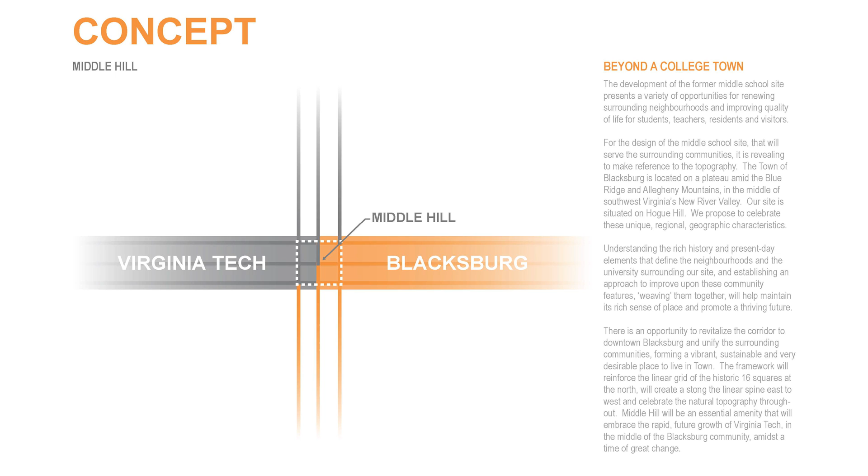We see this concept as a gradient, a meshing and weaving of the community of Virginia Tech and Blacksburg, which right now operates as very much two things—but really finding out what that actually means. So the proposal is the hinge between those two communities that are really one. The question we have for you is: what kind of place do you want Blacksburg to be? I think that's critical in thinking through the vision and setting up a new model for how development works, how public space works, how people interact.

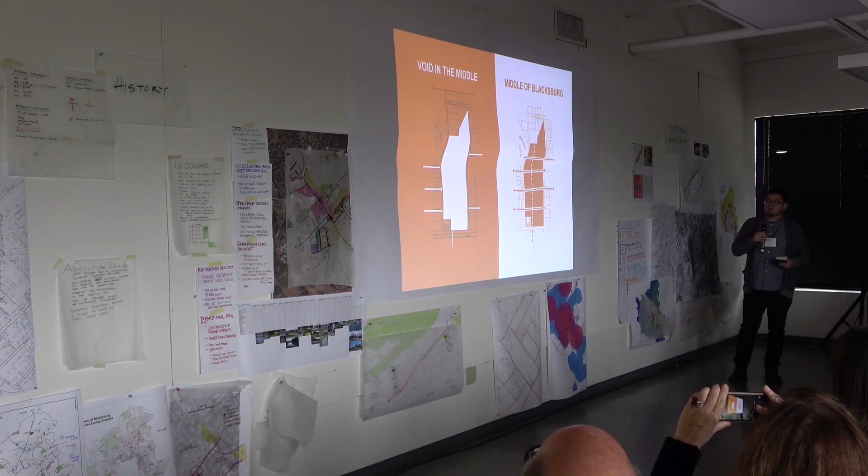The site as it operates right now is really a void in the middle. With these neighborhoods around it, it's fenced, not used, and the streets just dead-end into it. It has great opportunity to be activated, to actually become the middle of Blacksburg—a center where you cut across, move through the middle, engage what's happening, and create this engagement of the urban fabric.

So how do we do this? We have three large ambitions, three ideas to think about. One is creating diversity in demographics but also in generations—how do we get people of different ages to interact and see what the other is doing? That's one of the benefits of community: having people who are excited to be here.

And of course, providing meaningful open spaces. Just having open space or green space isn't good enough—we need usable and meaningful public space where people can engage with their natural environment through the seasons and see what the community is up to.

And lastly, really exciting Blacksburg with a slice of an urban experience. I think the bones are there, and the excitement is there where people want to be out, they want to be biking, they want to have a beer, and really finding these opportunities to make it a really exciting place.

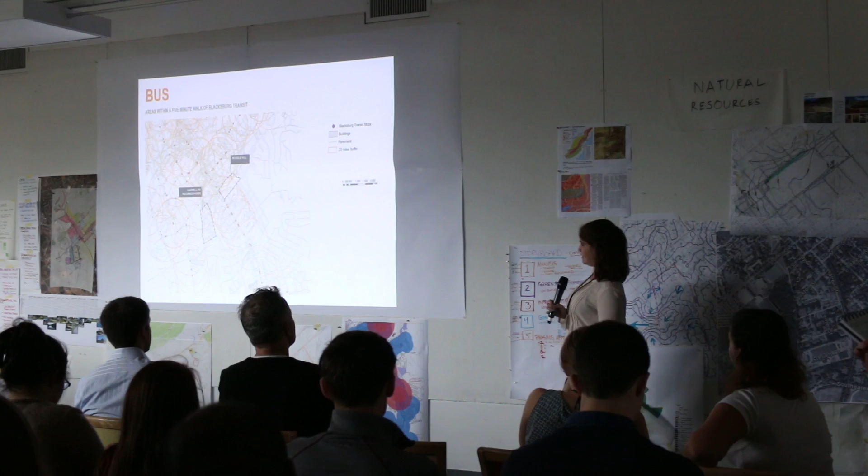Okay, I'm going to go over some of the analysis for both groups. We kind of jointly did it together. So a really important element in Blacksburg is the buses, the communication between Virginia Tech and the town of Blacksburg, especially as a student, since there's not a lot of parking on campus. So we mapped the bus stops to make sure these sites have a connection within the town of Blacksburg. The circles represent a quarter-mile radius, which is about a 5-minute walk, a comfortable walking distance.

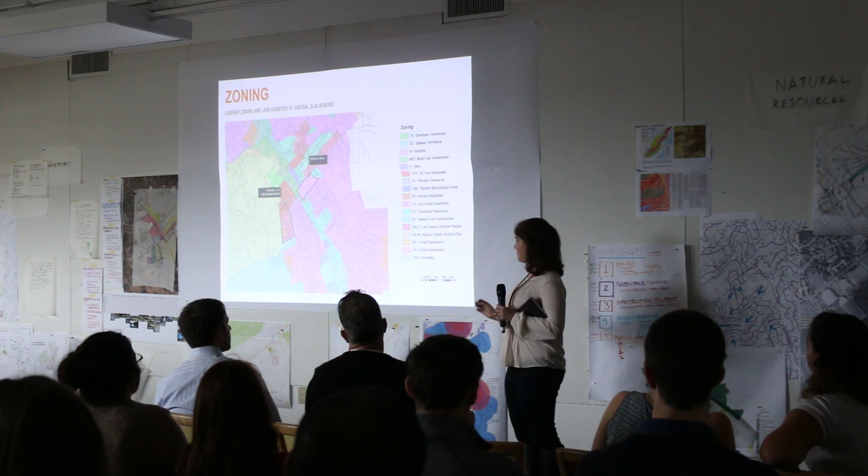So zoning within the area: the green to the left of our site is the commercial downtown, your mixed-use shops, restaurants, and small shops, with the top being apartments. Next to that is the campus. Then to the right, that's kind of our site, the Middle Hill, which is really the gap between the downtown commercial and the rest of the commercial area strip. The Harrell Street neighborhood is mainly residential, more historic residential, with some lower density residential use.

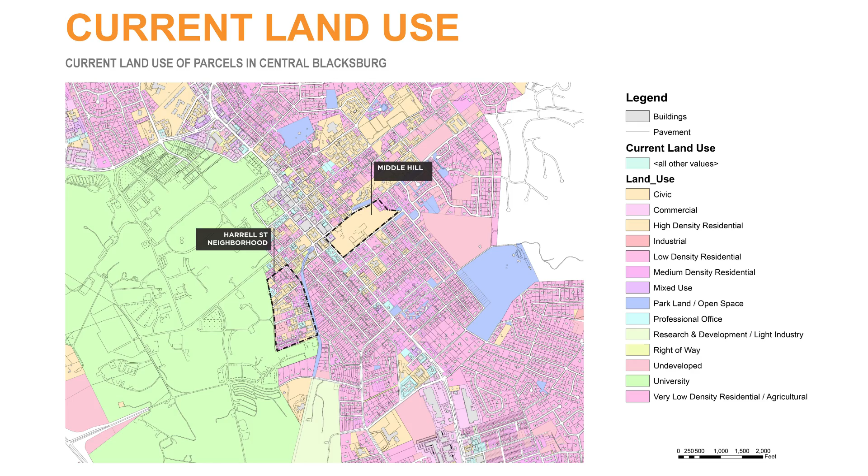So we looked at the current land use for the town, and Middle Hill was actually still zoned as civic, even though it said it was going to turn into low density. And Harrell Street is very much medium density residential, which is picking up its current population and density.

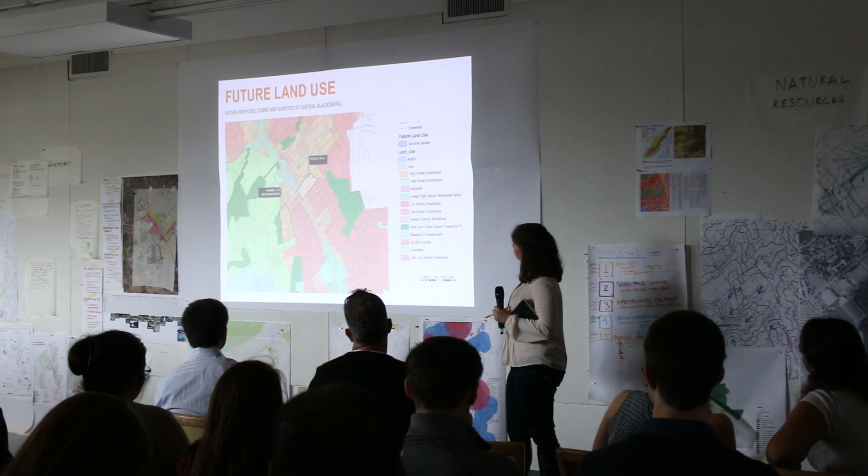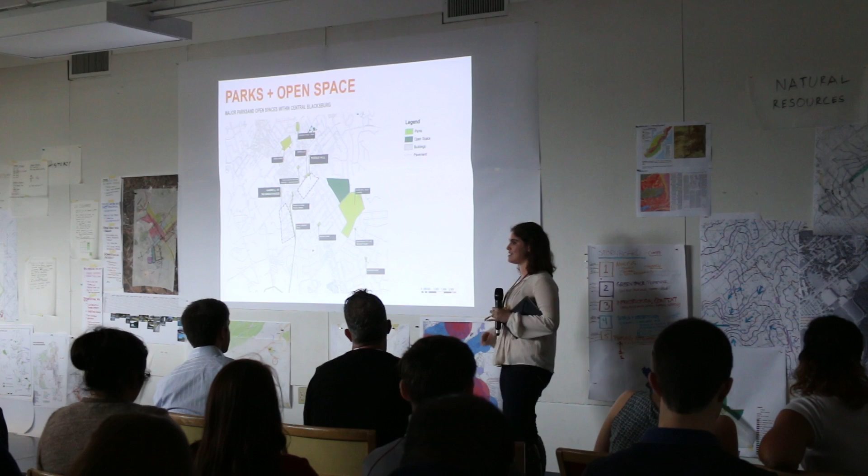Another thing to note is that right next to Harrell Street is the Huckleberry Trail, a rail-to-trail program for bikers and pedestrians that connects us with Christiansburg and to the Jefferson National Forest, which is very popular for students and for the residents of Blacksburg.

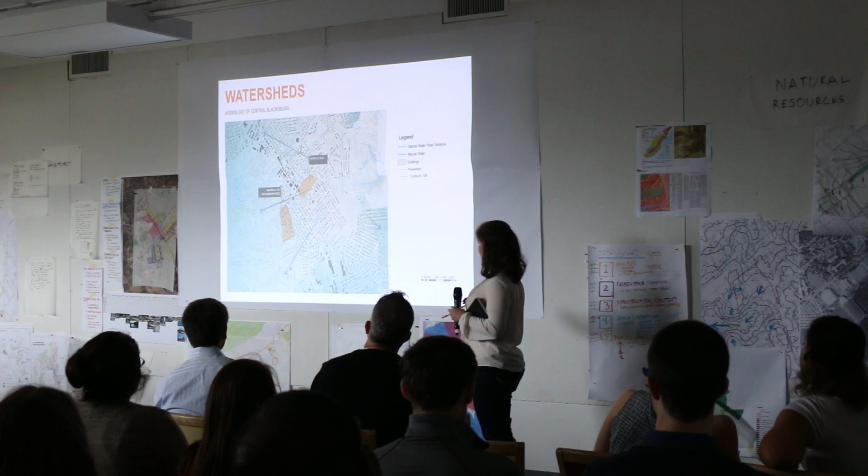So, our watersheds in this area: Stroubles Creek runs right underneath Drillfield and Virginia Tech, with some other minor watersheds, and all of it flows away. Where the golf course is, up there, that is the high point, and from that point you can see all of Blacksburg if you ever want a good view. All the water flows away from that point, so we are at kind of a higher point where our two sites are.

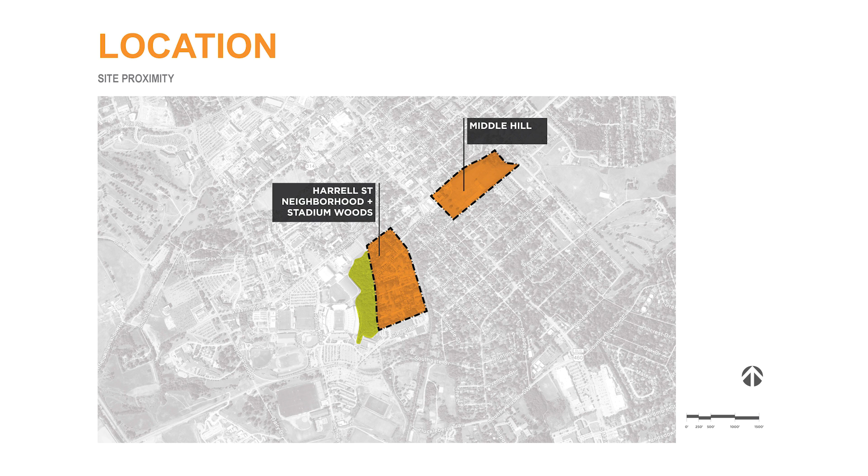So these are the two locations of our site: Middle Hill, which is really the middle between the downtown and the commercial area as I said earlier, and the Harrell Street neighborhood, which is next to Stadium Woods, the only remaining old growth forest in this area. It's also next to Virginia Tech and Lane Stadium, so it has become an important part of the Virginia Tech culture for tailgating and other areas, and a lot of students like to live there because it's so close to classes and campus.

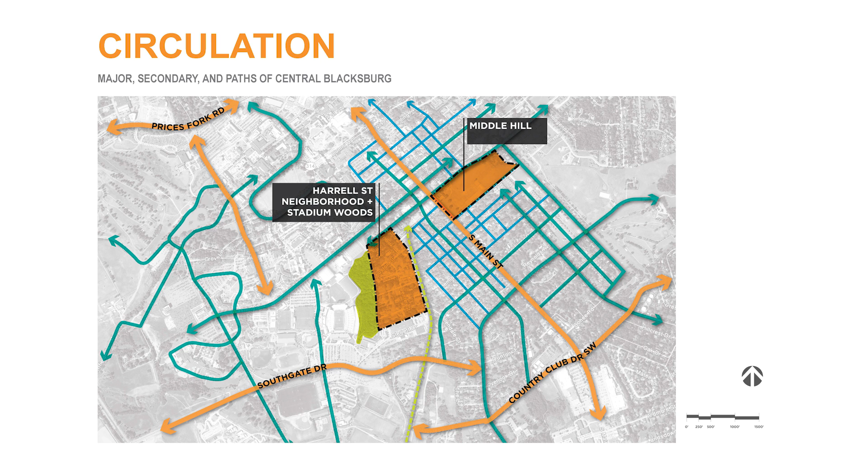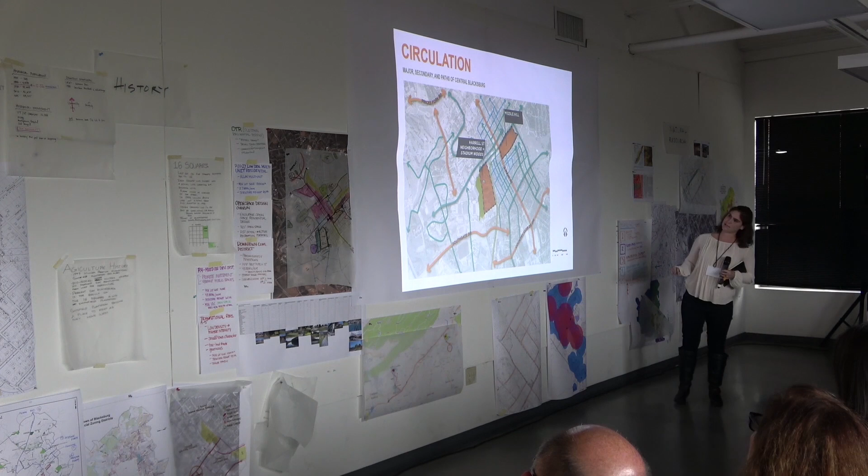So some major circulation is Main Street, where all our shops are, and some minor streets off of Main Street are important as students and residents try to skip Main Street. Other important things, as I mentioned earlier, include the Huckleberry Trail, the main pedestrian and bike path in Blacksburg, and some minor streets that help fill the void of getting around Blacksburg. There's the Country Club off to the right, and College Avenue, which goes straight from Virginia Tech to Main Street.

So some basic history of Blacksburg: it was first settled by Native Americans. When the Europeans first came here, there was a lot of conflict between the Europeans and the Native Americans. Then the Black family settled in Blacksburg and laid out the original 16 square grid, which I will get to next. As it developed, Virginia Tech was founded in 1872, and that promoted Blacksburg's growth.

However, Blacksburg did not really grow until post-World War II. With the GI Bill, a lot of World War II soldiers came back and went to Virginia Tech, and that's when our need for housing came through. Also, when the university transitioned from a military school to a full public, civilian co-ed school,

it saw a big population boost, and then we also created a big population within the town of Blacksburg to support the school. The 16 squares was the original grid laid out by the Black family, and they divided each square into four lots. This is really important because it's right next to the middle school site, and this fabric is still here today. So one of our goals was to try to weave the existing infrastructure with what is already there.

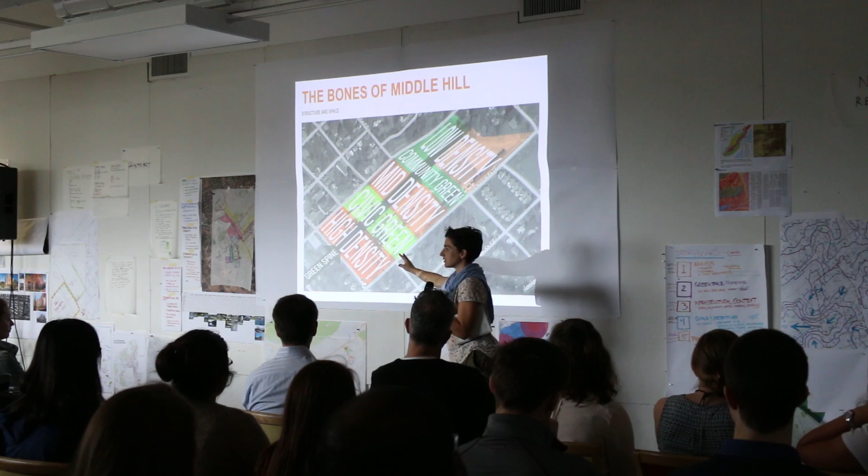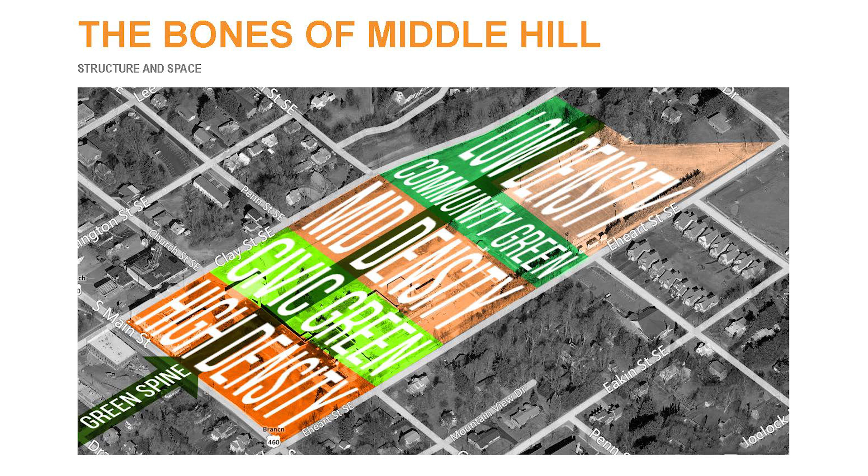As was mentioned, our idea was to incorporate the former middle school site into the urban fabric of Blacksburg. Our overall concept was to start with the highest density along Main Street, where there's already more high density development, and to let that ease back with middle density and then low density development as we get closer to the single family residential areas, breaking that up with green space.

We had two types of green space we wanted to include. One was the civic green, which feels more like part of the urban area, like a city park for everyone to enjoy. And then a community green that speaks more to the neighborhood that's there.

Looking at how that schematic could work onto the site, we began with that 16 square grid and decided to use the circulation as a structuring force for the rest of the design. You can see here how we've brought some of these streets all the way through the site, and some of them just come to serve residential areas on the end.

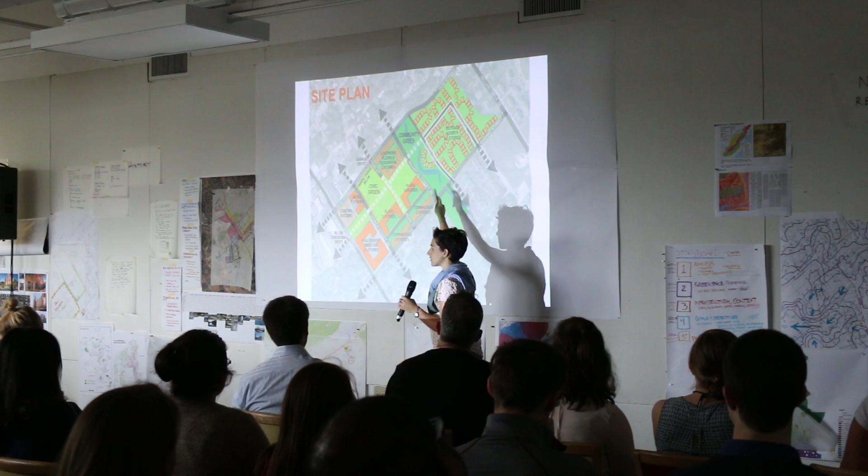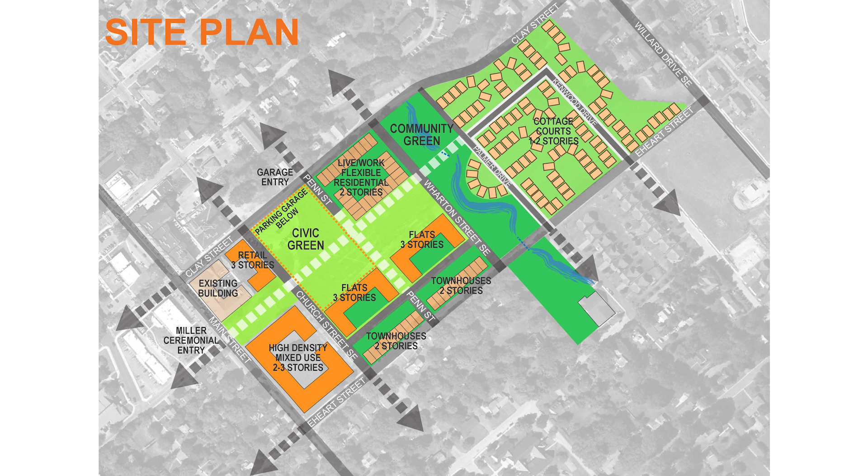More specifically, how that's built out is taking that pedestrian line and making a green spine that runs through the site, so that from this point on Main Street, you're drawn into the site. Right along the edge, we have some high density mixed use development. We're kind of open to what that could end up being, and it could be transitional over time.

Moving back onto the civic green, we blended the high density and mid density so that the civic green really had an urban presence with some higher story residential facing the park. Then along Eheart and Clay Street, having more two-story residential townhouses on this side to relate to the more neighborhood community, and more potential for live, work, or flexible housing space on Clay Street to continue to speak to the urban fabric on the other side.

And then this community green that's going through the site here relates to the church and school that exists up Palmer Drive, taking advantage of the topography of the area, with a pathway up in that top corner.

There's a kind of outflow of a lot of the water from this neighboring area, so we decided to emphasize that in creating a community green that is speaking to the stormwater that exists on site, and kind of creating a more ecologically based and more flexible community green space where families could have their children come play.

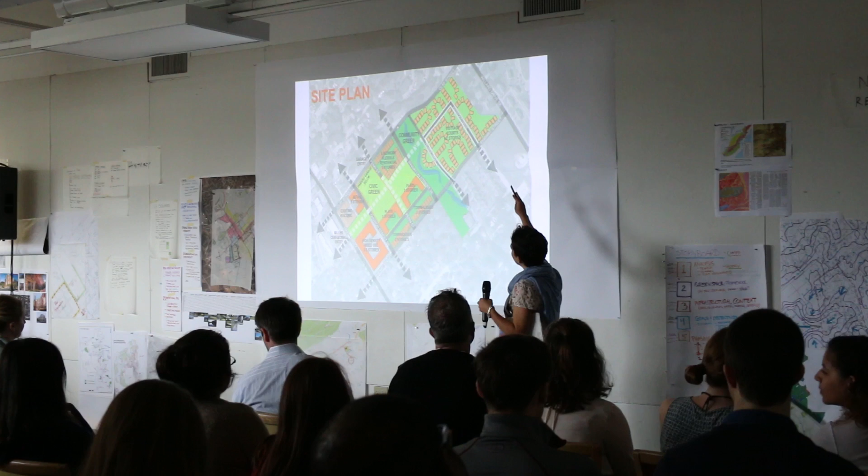And then the low density development beyond, we were looking at more of a cottage court style where the houses are facing more private greens, but it's still a community feeling. So as opposed to getting as low density as the areas around it, keeping it at slightly higher density, more affordable housing in that area.

So this gives you some cross sections. This is the Middle Hill Promenade, that's Main Street there, and then going back to the smaller scale residential so that you can get a feeling of how those different typologies would read in relationship to each other. And then this would be a section along Main Street looking into the site here.

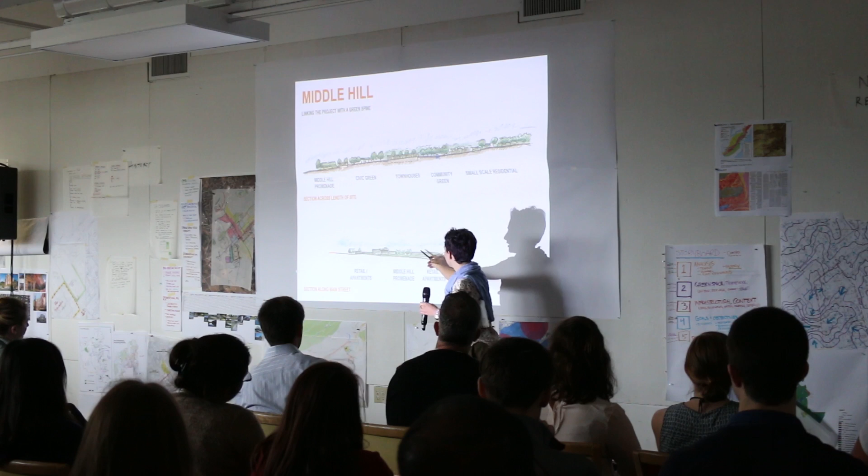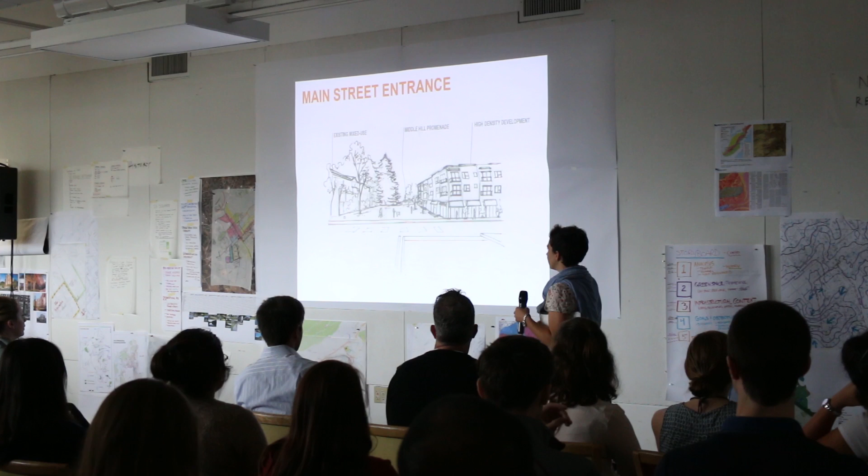So we've got the existing retail and apartments, and then the promenade that pulls you into the rest of the neighborhood, and more retail and apartments anchoring this other end. And so this is a view of what that might feel like, really allowing the space between the buildings to be like a community space and a green space.

And so this is looking at just what these masses might feel like if you're coming from Miller Street. We thought the connection to the library down Miller Street was really important, what it felt like for you to come down that street.

Maybe you've just rented a book and you want to go read it in the park. What it would feel like heading down there. You've got this strong urban feeling of the buildings next to you, but you're going out into a more open space.

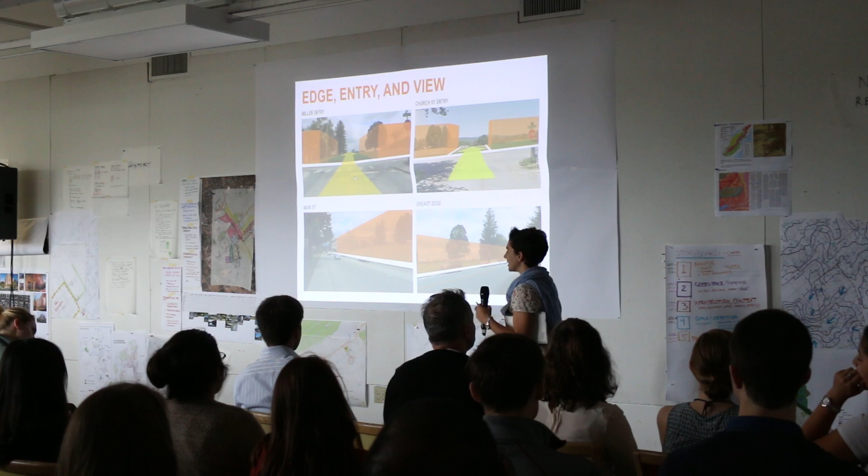So I'll continue to talk about the massing study. And what the model is trying to convey is just in block form what might be the spatial differences along the whole entire site. So what's omitted from here is architectural differences or softscapes or hardscapes, but really just looking at the spaces.

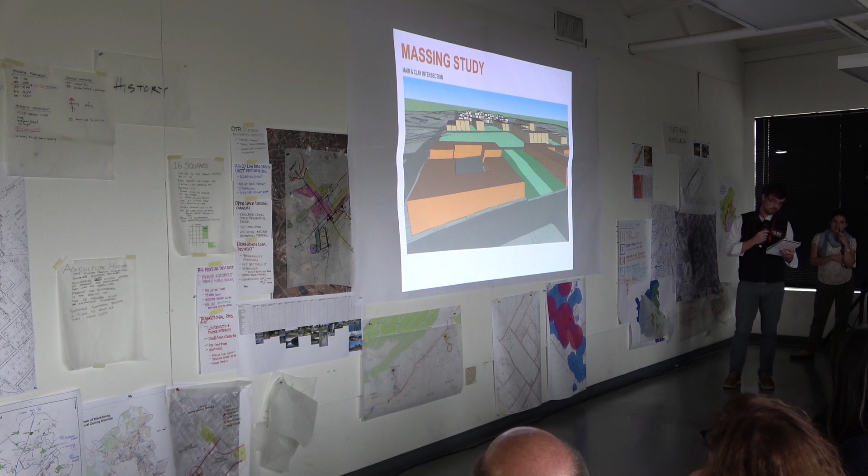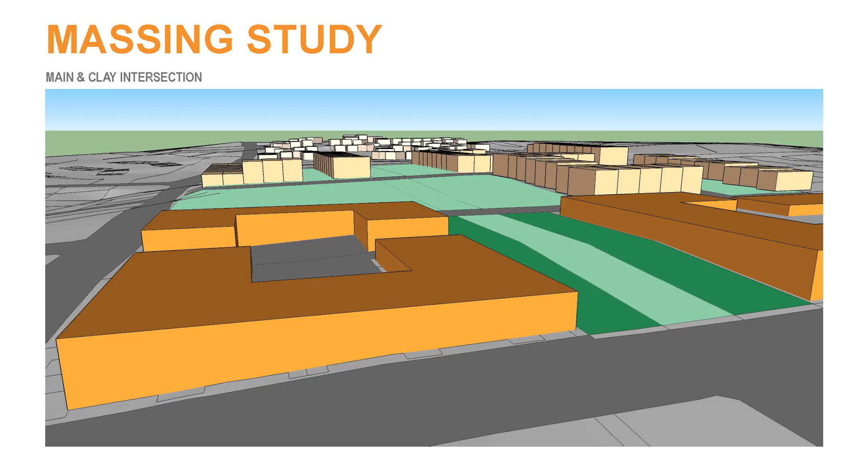So here you can see the strong spine that goes through the middle, as well as how the topography relates, in that you have an existing building on the corner. Again, the spine, you can see how we phase it, and that the site is fairly structured on the Main Street side and then loosens up as you go through the civic space and then on through the mid-density and then to the lowest density in the back.

You can find opportunities to hide utilities or service sides of the retail or shops on the inner side. Maybe that's parking as you go through the site.

Here's Main Street and Eheart, and with the topography, if you have a 3-story building that exists, you have more of a residential feel on this side as you're approaching downtown. Right now it's a very stark contrast, and that might be stark just because you don't have a feathering effect.

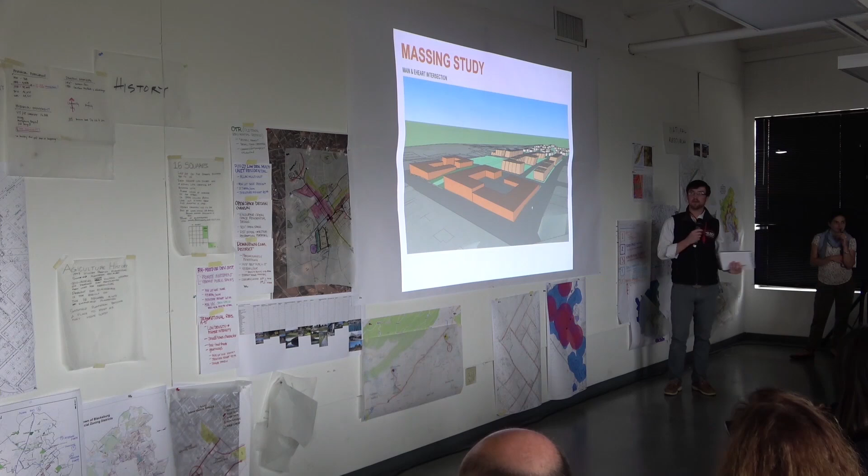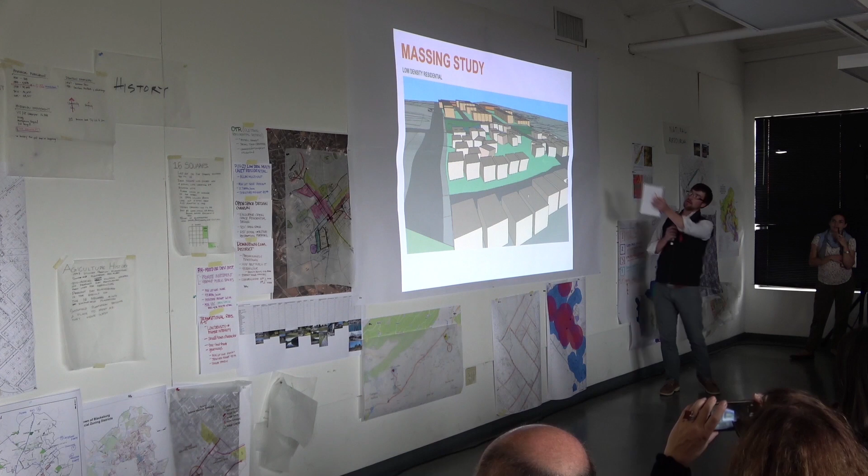And so we're stepping down the buildings from 3 to possibly a 2, but trying to find some opportunities for diversity through there. This is looking from the back of the site where the low density housing is to the front of the site.

So myself and my colleague Lauren are going to be talking briefly about the housing typology, or in other words, what those building masses can begin to look like and function as places for people to live.

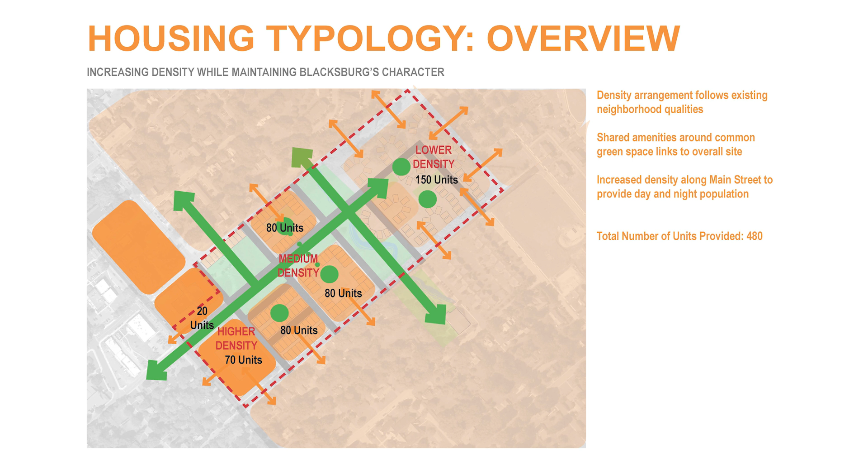So as we mentioned before, the general concept is to go from higher density to lower density, taking what's already existing in the surrounding neighborhoods and bringing that density, that typology, that character into the site. So in the end you have that retail strength on Main Street, and then going back to more of the cottage home experience in the back end, all working off that central spine.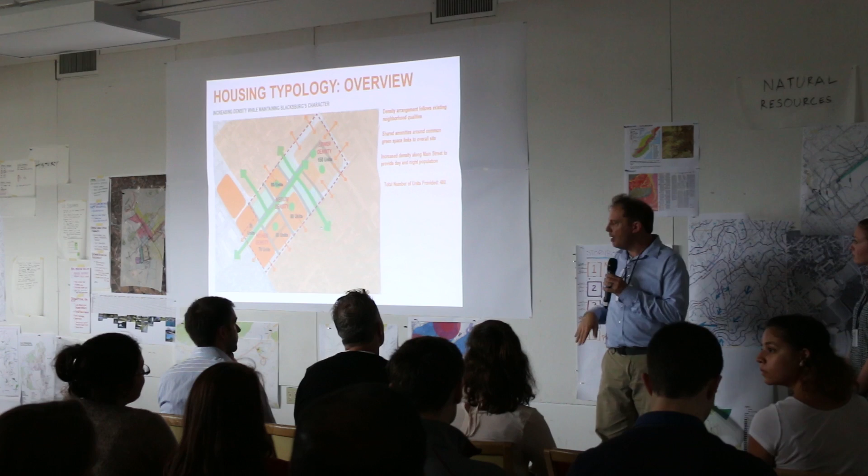Perhaps in each of those typologies it might be a simple common space. On the downtown density side, we're looking at roughly 35 units per acre, kind of what's already on the northwest corner, where you'd have retail on the ground level with apartments above. What we're thinking for the overall site is to have a mix of occupants, predominantly maybe students, people looking for affordable housing, young urban professionals, and also senior citizens.

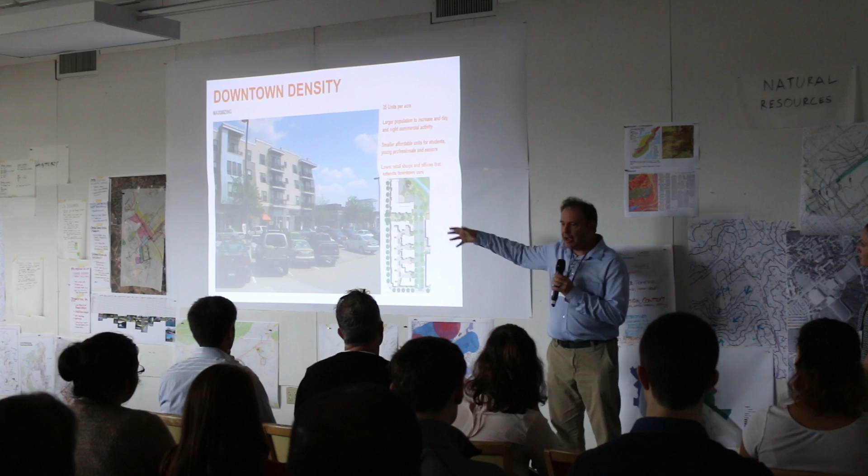Otherwise, having that strong presence, creating that facade, and maybe in the back having tuck-under parking and other public amenities, open spaces. In terms of activating the streets, having retail on the ground level like you already have in downtown Blacksburg, but perhaps also introducing live-work opportunities. So along some side streets, if offices come in, great, they can set up shop, or if that need isn't there immediately, it can become basically a living unit. So there's some flexibility over time.

And then as we start getting to the medium density, this might be another typology of student housing, where you have again a parking lot that interfaces with common amenities, backyards, barbecues, and so forth.

So we're really starting to look at making these streets for people, and this is an example of a street that is shared by people and cars. So being able to create those spaces, kind of like College Avenue here, within the site that aren't strictly specific to vehicles and can be transitional between the car and the person.

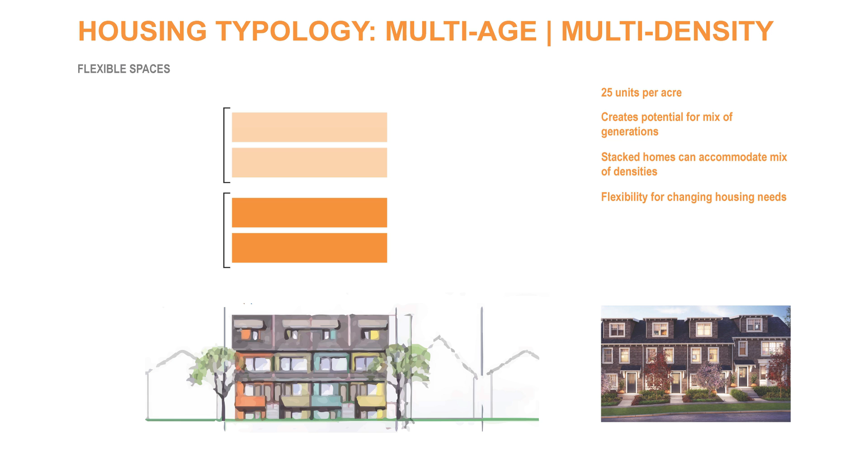This was looking at medium density housing, and flexible spaces in some of these structures that could be multi-age and multi-density. This is basically a stacked townhome design, but looking at how we could alter the standard of who's living in the housing. So how can you put old people with young people, or families with single people, living in the same building and having that mix of generations and densities.

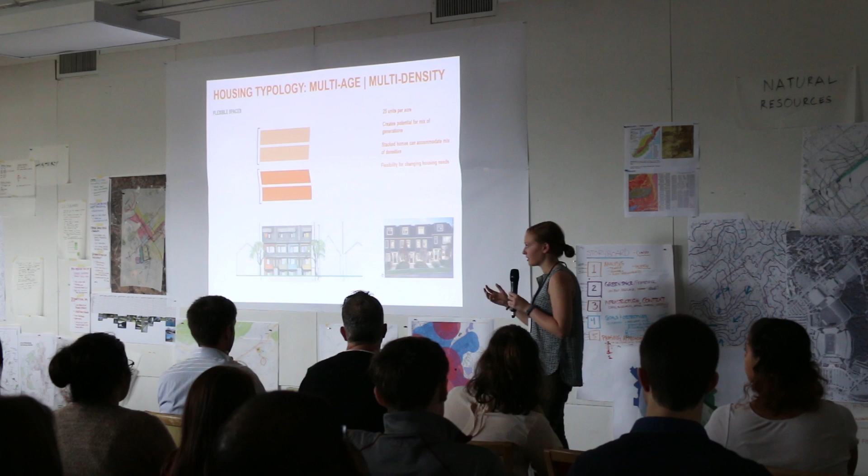This was also in the medium density area, so both of these were roughly 25 units per acre. This was really looking at communal spaces and private nodes, creating these spaces and this network of spaces and how they relate to the building. So we were looking at a few diagrams pointing out some of these public spaces and how they can be tied together, and then how some spaces can be shared, and where the private parts are within these residential units.

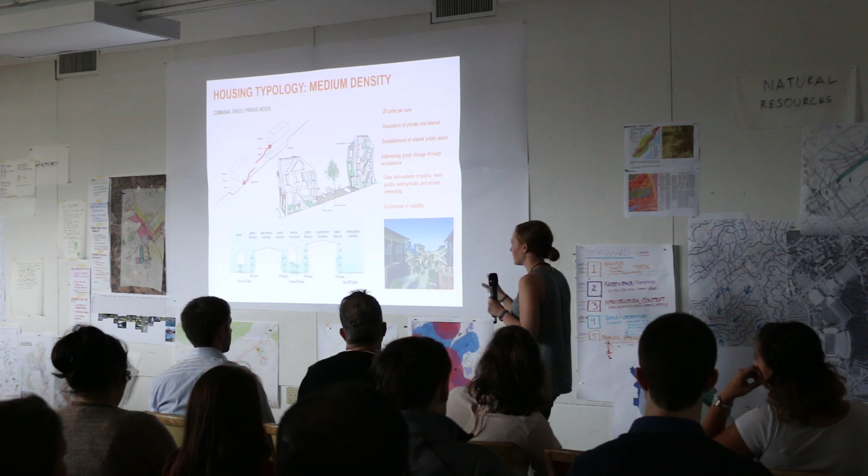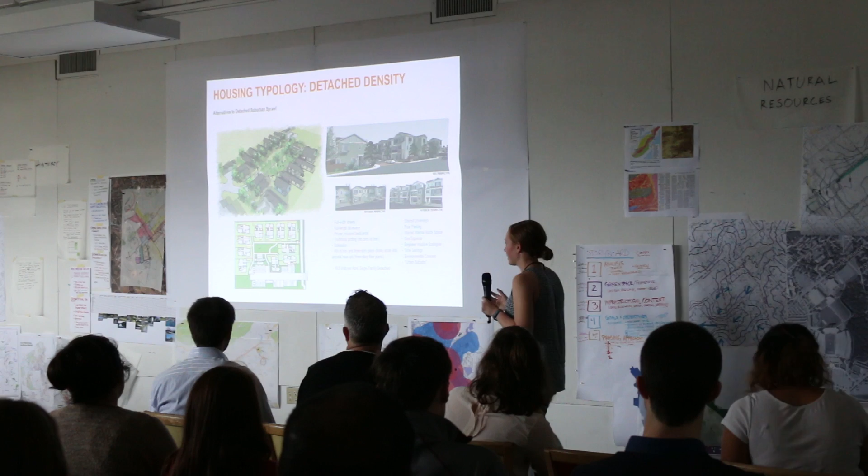So this is getting more into the lower end of the density, at the farthest back point in the site. This is looking at some detached densities. What we were really looking at for these more detached homes was fitting the character of the surrounding neighborhoods. So we were very careful not to put very high density next to the existing single family housing, to make sure this new development would blend right in with the surrounding single family.

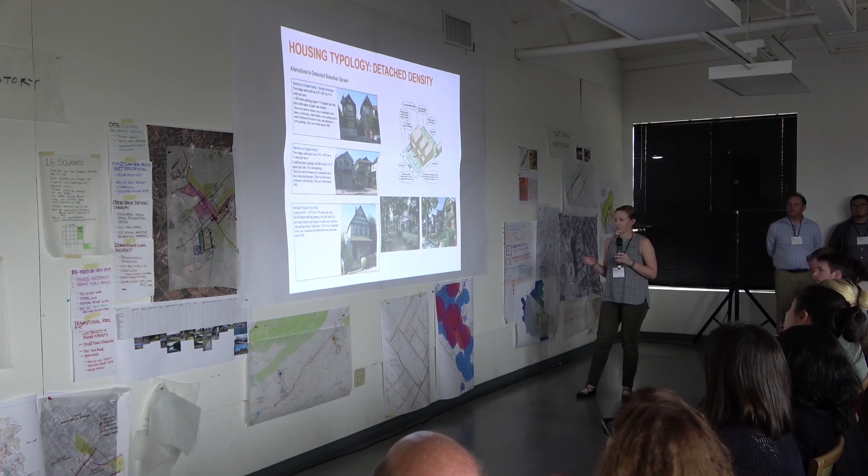And this is again looking at a detached density. So these are creating some of those same shared spaces, those same common greens, and also relating very closely to the single family housing that's right next to the extended roads.

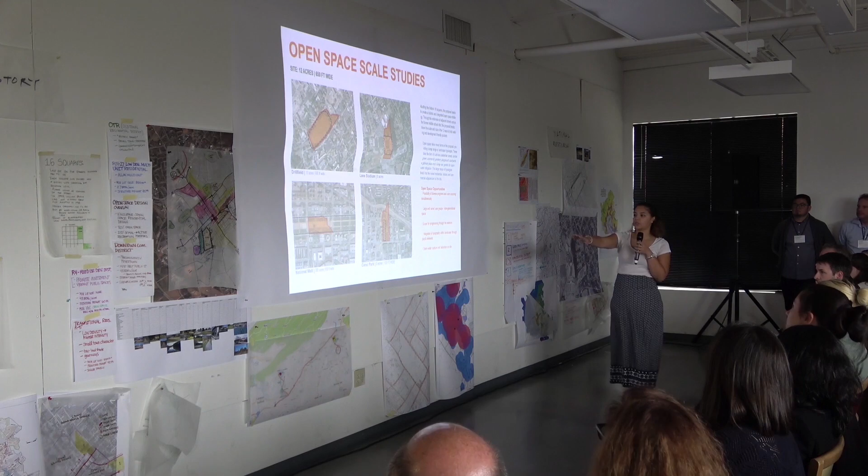Okay, so just to give you guys an idea of scale and size, we compared our 12-acre site to places you might be familiar with. So two on campus, the drill field and Lane, and then two you may or may not be familiar with, National Mall and Canal Park. So looking at the drill field and Lane, how many people can fit in sites like that. Stuff like the Big Event or Relay for Life can fit a lot of people in the drill field, and Lane for big football games. So how many people can fit in our 12-acre site?

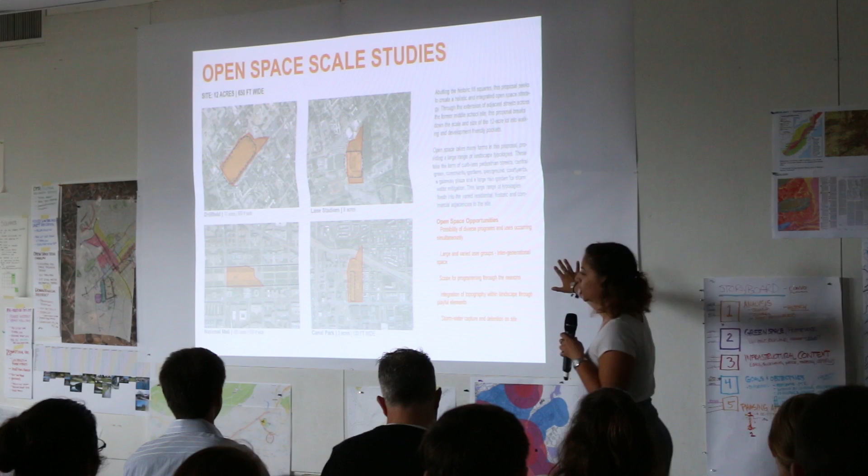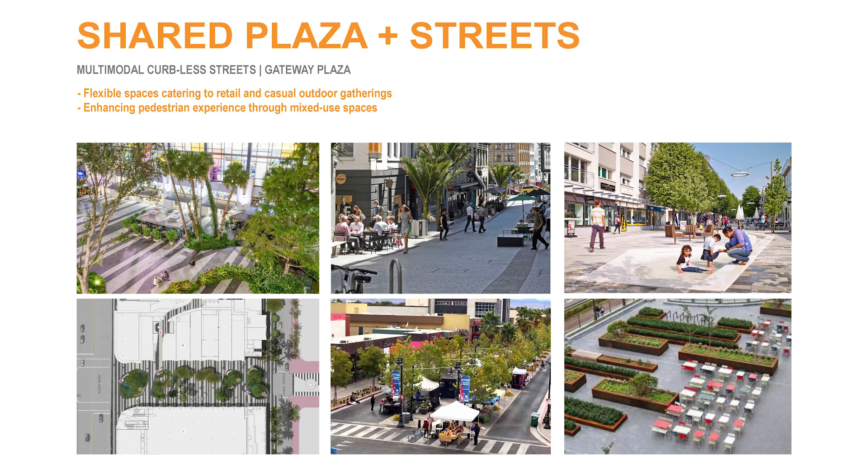So then looking at shared plaza and streets. The first two you're looking at are actually kind of to scale, about 100 feet, and we're looking at that very strong center green that was talked about in the plan. If you look at the next few, you're looking at this curbless double use, especially for retail, so not only can you use it for cars, like Lauren mentioned, but you can also use it for pedestrians.

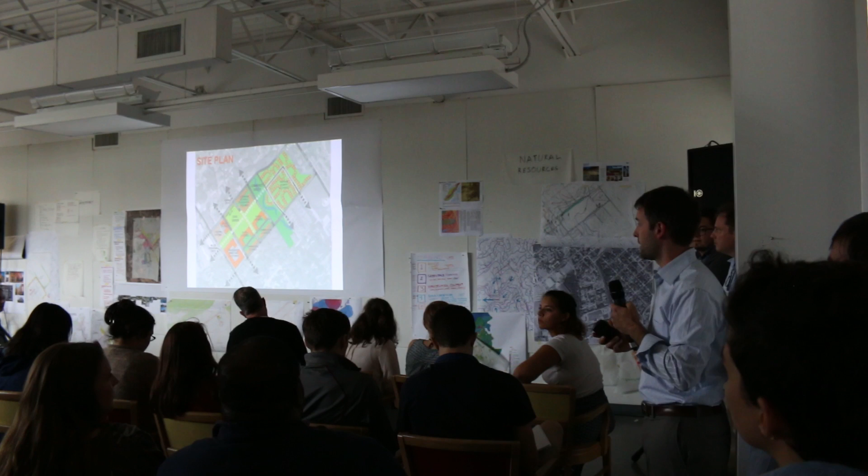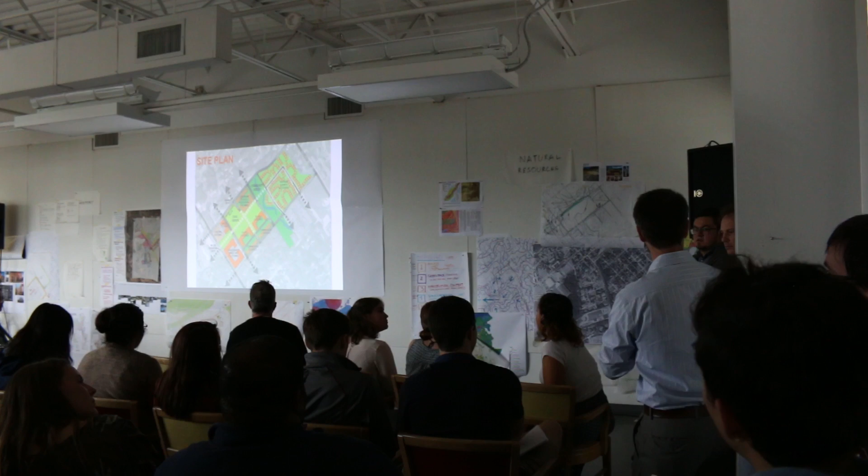As we looked at the 16 square area, realizing that chances are as the university grows and as the community grows, that's going to be a part of town that'll grow and change too. So how do we set the stage in this design with the civic space that opens up onto Clay Street to eventually become a center point for the community as the area around it continues to grow? I don't know if anybody else from the team has a sense, but...

I think another main principle we were going off of in creating the character of this site was that as Blacksburg grows, we want it to be a more integrated community between the town and the university. We wanted the character of this place to be that meeting point at which we start to blur the lines between what is Virginia Tech and what is Blacksburg, bringing it out as a mixed use family and student community, giving it less of a distinct identifier than most areas of town seem to have right now.

Yeah. Okay, over here. There you go. Hi, I have a question.

I thought it was really interesting, your notion about the middle and the drawings you showed us at the outset that showed the geography of this site relative to the town. I'm curious about your proposal and concept of this place as a moment along Main Street, because Main Street is currently probably the one thread that actually, if not binds, at least makes its way through these various regions or districts in Blacksburg. Could you talk about your proposal as it relates to the sequence of place, and that question along Main Street?

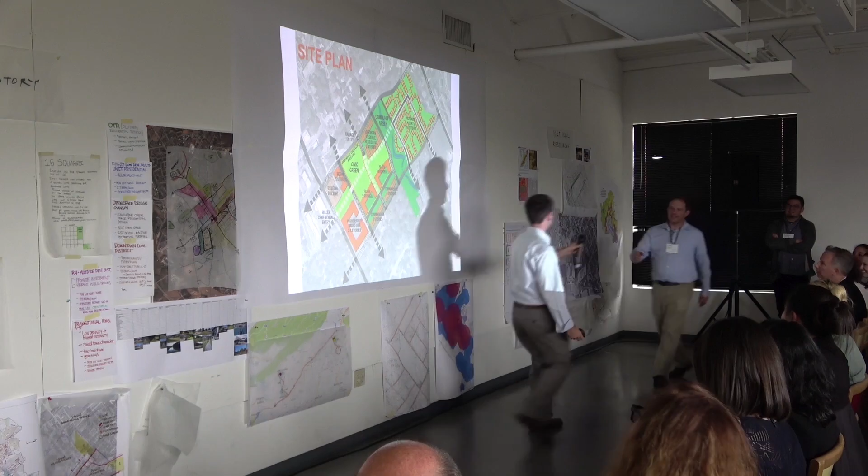Yeah, take it away. I think it definitely was a struggle, because on one hand, how do you create that public space, but at the same time preserve the character of walking down Main Street again? So it was creating something that had linkage to the library down Miller Street, but at the same time is open and permeable to the surrounding streets. We were tentatively thinking what would happen if there was a building here and it becomes enclosed, but then it becomes too private, or it may not read public enough. So allowing for that very strong access towards the higher density, more downtown part of the area.

But it was definitely a struggle. The other thing too was looking at the topography, and right now where there's that drop potentially underneath the Civic Green, putting parking so you can hide a lot of that. So there was kind of a combination of things of why it was there. And part of it too is just thinking about where we could have that larger space where it was kind of already graded somewhat flat against Clay Street.

Like any good academic exercise, you're trying to do a lot. There's a lot of stuff going on here. What's most important here, though? There's housing, there's open space, there's connectivity. I think the interest in doing all these things might dilute the overall strength of any one single idea. So I'm asking, what is most important here? What is the critical dilemma that must be overcome for the project to be successful? I think Ben's comment about the Civic Green reflects a trying to do a lot of things set of objectives.

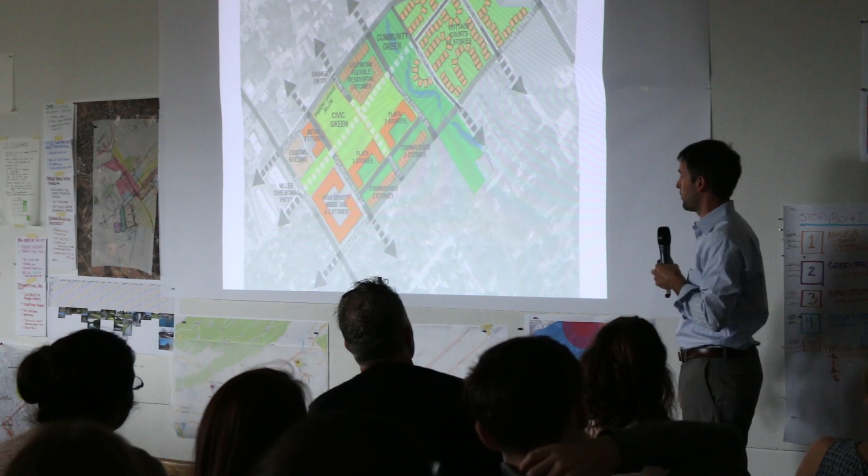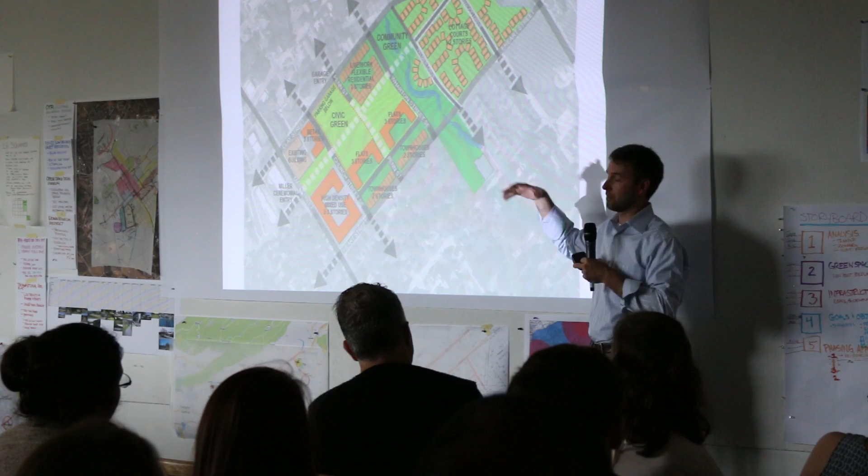And then I think on the residential side, the sense is that with the university growing and the city growing, if there's 5,000 new students coming in, not only just where are they going to live, but where are all the other people that are going to live. We heard a lot about affordability issues in the city, so trying to think about how can we get a kind of flexible arrangement of housing in here so that we can build in affordable housing, that we can build in multi-generational housing, so that people that are retired that have a house that want to downsize and they're done with their yard, they have a place that they can move that's close into downtown that they can walk to, and their house is now open for somebody that wants a single-family house to move into.

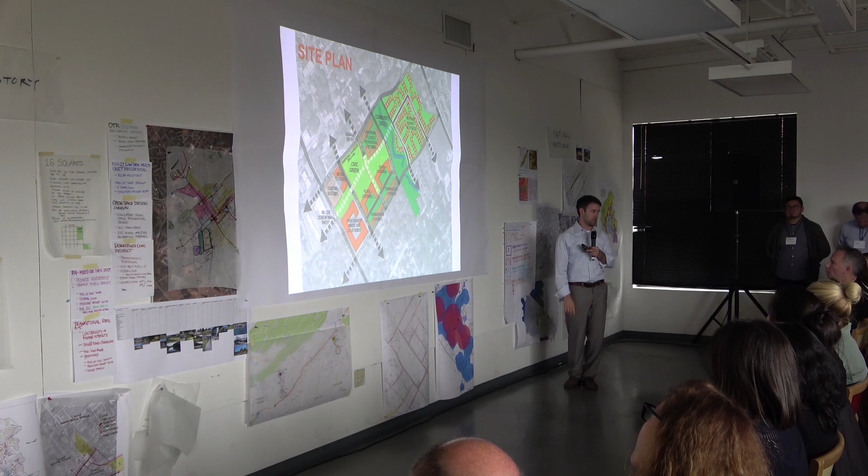So those are kind of the two, the open space piece and how we really provide something for the community, and then merge that multifaceted residential piece into it was really what we were kind of grappling with.

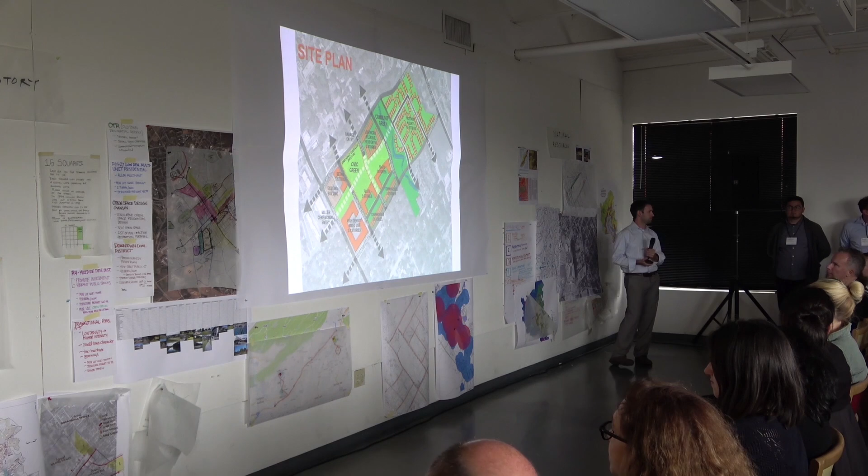I think there was also a point in putting it all together, trying to say that it doesn't need to all be separated the way it currently feels in Blacksburg, where residential areas and parks don't seem very attached to the city and retail. Part of our argument was that it could all go together and be equally valuable.

All right, we'll go down. We have time for one more question, maybe? Two? Okay, we'll do two.

One observation I have in your presentation is there's two best friends to landscape architects: structured parking and mass transit, in this case bus service. I didn't see either really addressed. Parking gets mentioned in quick comments, but not in a formal presentation. What concerns me is your amount of green space will get immediately traded off to surface parking if structured parking isn't in place, and a lot of your secondary green space will get lost, because you could be talking about 1,000 plus automobiles that have to be stored on this site, as well as multiple buses coming through during the day.

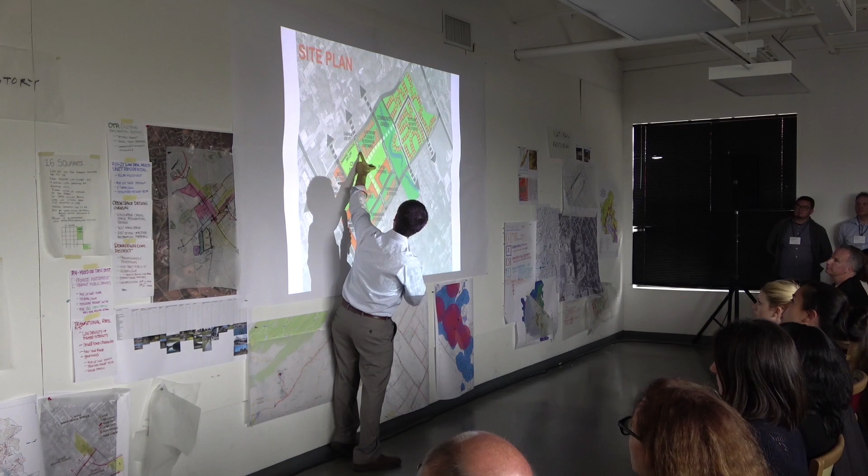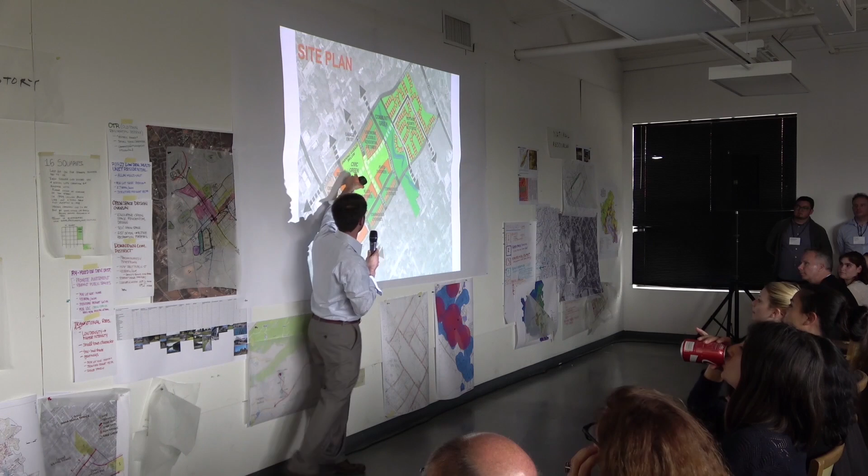Yeah, we didn't touch on the parking piece, so I'll mention that quickly. This road that comes in would be an in and out for an underground parking structure built down below that green. There's about 400 or almost 500 housing units here, so you would definitely need parking for that. Along Clay Street there's about a 15-foot bluff, gently rising up, so being able to peel that back slightly but use that elevation change to tuck in some parking that you could then use as a civic space on top of. That's kind of where we were going with that.

But, all right, there's a question back here. I'll pass that back.

I'm Donna Dene, a faculty in the school, but I also live within 300 feet of this site, a long-term resident.

I think this question down here is one I want to follow up on and ask, because in some ways, the way we look at this thing, are there indicators to us as a community of what to take very seriously? I frame that question in the sense that we all take on assumptions, and we have no idea what those assumptions are that we're taking on. We live in a real world, but one thing the real world holds is things we could never believe would have happened, like the High Line, or to keep the same locale, Central Park. In our community, this was a former school site, so it is somewhat still in the hearts of the community. It's a huge acreage, as you've shown. My question, to get back to what you said in the last answer about open space: what should we really work towards as a community that we may be overlooking, that we all assume cannot be 100% park, civic park? Central Park certainly demonstrates that the surrounding area can take on the development. So are there indicators in this of something to let go of, or other ways to leverage it?

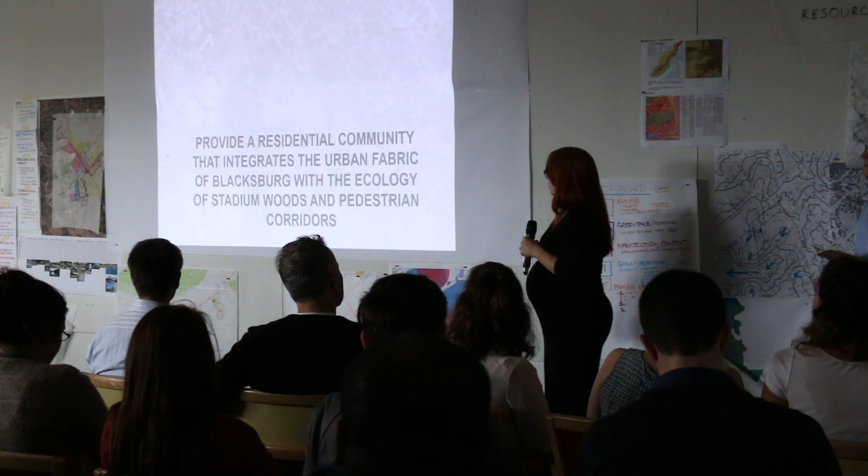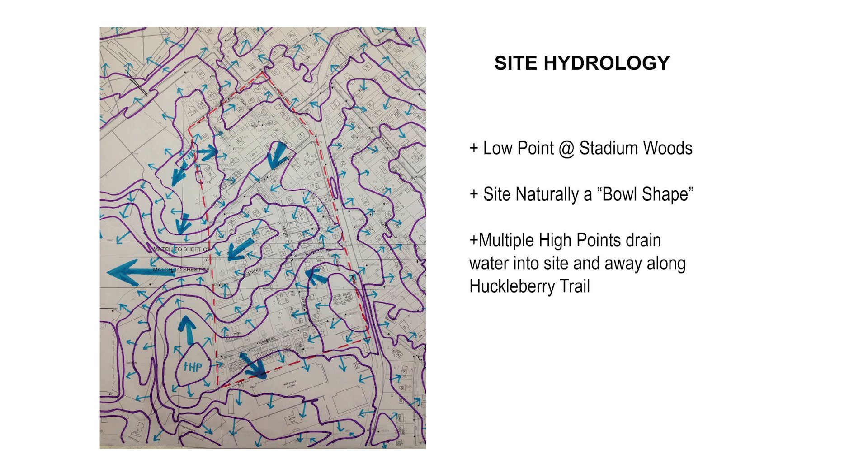The idea of the cradle really comes from a more specific analysis of the site. All of the water generally flows through the center of the site and through Stadium Woods, which creates a kind of bowl. Everything is based around this concept of dealing with stormwater and creating a fantastic space.

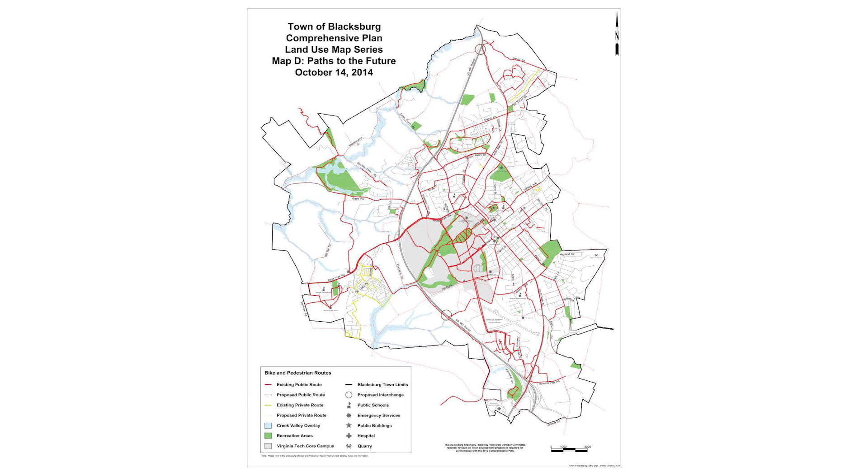As we've already talked about, we had a spectacular challenge of working within an existing framework of a site and trying to re-envision what that could become. We thought it was worth taking the time to set some goals as we approached this site.

Our first goal is to reinforce and create connectivity, speaking both ecologically and socially. For the objectives of accomplishing this, we really wanted to reintroduce forest acreage to our site. We thought of Stadium Woods as a spectacular resource right next door, and that extending that resource into this neighborhood would be a very valuable asset to use.

Goal 2: provide multi-generational housing. We spoke about this in the previous group - there's somewhat of a housing crisis in Blacksburg. How do you house people appropriately, and what does that look like? Our objectives for this goal were to preserve existing urban character, respecting the neighborhoods we border, but also recognizing that we're very close to the stadium, giving us an opportunity to introduce higher density because of that relationship.

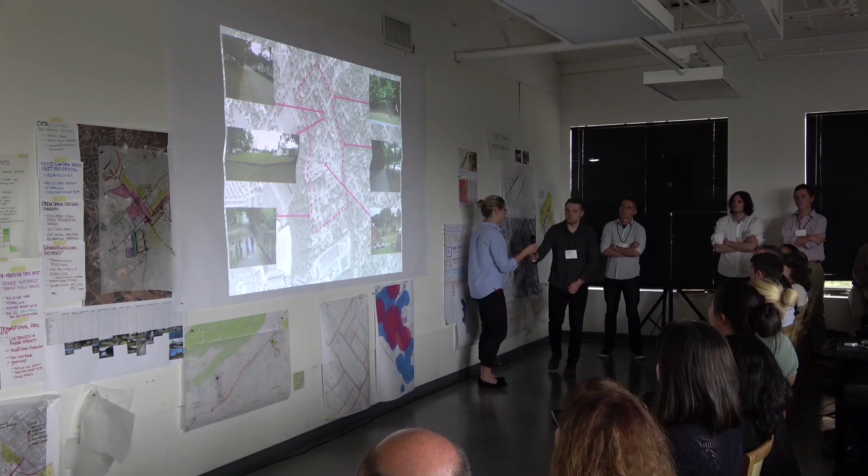So I'm going to quickly talk about the current identity of the site and then go into our design approach. Currently, when I entered the site for the site visit, I felt like I entered a different world - you're kind of in this cradle, as we're calling it, surrounded by green space and woodland of the Huckleberry Trail and the Stadium Woods.

But there's also just these large open plots with these very small houses in them that gives them a weird kind of identity, but it also creates a space that I think the students like because it's kind of on this fringe or in this cradle, kind of away from the other identity of the campus.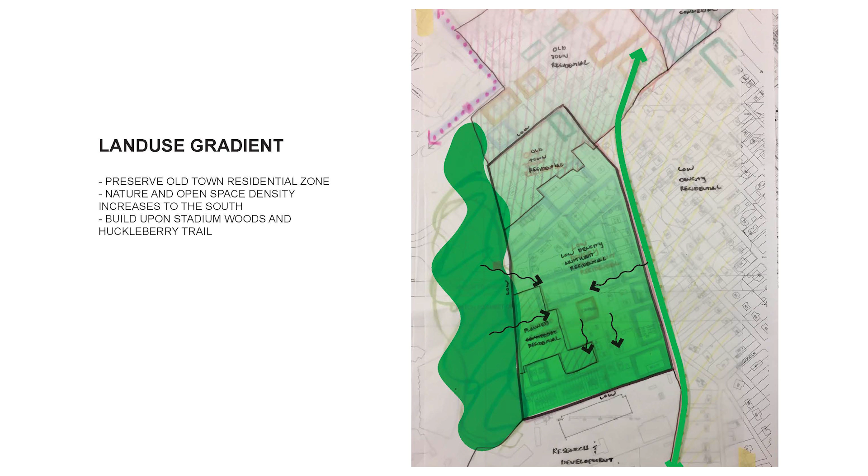And we're saying we want to bring that identity of the woodland and the Huckleberry Trail into the site, bleed it in, make it more dense as you go further south, and kind of preserve the Old Town residential identity and don't displace anyone in that neighborhood.

Next slide. So this is a current infrastructure and green space slide. So again, you have Stadium Woods, Huckleberry Trail. This is the current lot layout.

We've marked out cul-de-sacs, areas of dead ends. It's kind of really disorganized on the site right now, and also just large parking lots that are usually half empty, half full, sometimes always full. And then also vacant lots, houses that are for sale and that are currently vacant that we can use.

So using this map, we've created this kind of overlay of green spaces, of those parking lots, those cul-de-sacs, those vacant lots that can be like immediate green spaces for this community.

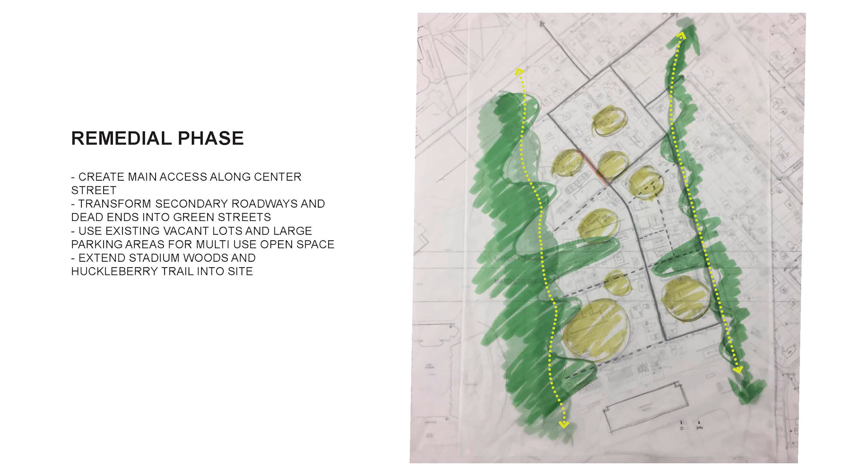And then kind of connecting the spine of Center Street. There's currently a dead end here, and just creating this strong access down this linear site that has a circuit back up to the downtown area, and then taking those secondary, tertiary roads and turning them into green alleys for curbless vehicular pedestrian use. And sorry, also kind of in this phase, if you go back a slide, bringing in...

Kind of bleeding in at the low point of the site, Stadium Woods and the Huckleberry Trail.

So now the second phase, kind of transitioning from those vacant lots, then connecting those green spaces with a landscape network, turning these green streets into actual bioswales on either side, lined with trees so that during events they can be used as event space.

Totally connecting Huckleberry Trail to the Stadium Woods, and then also just creating these larger open spaces.

Next. And then what are the identities of all these open spaces going to be? So further to the north where you have the single family residential, it's more oriented towards them with play areas, flower gardens, stroll gardens, entry gardens for the site.

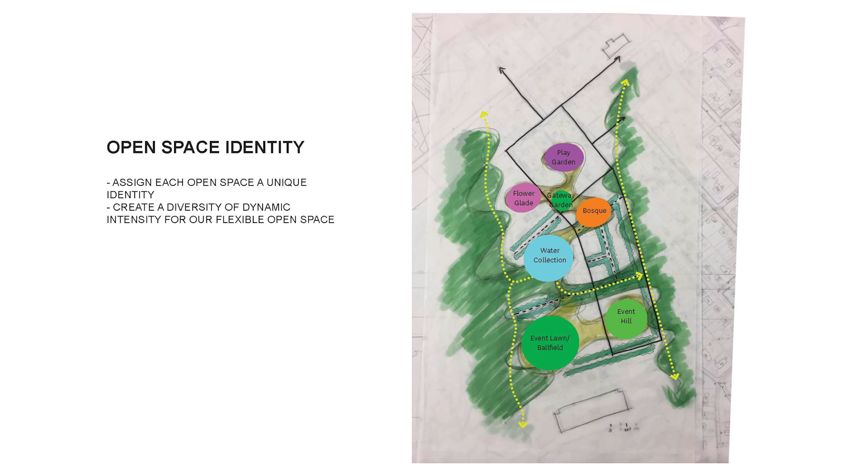Maybe there's a bosque at an intersection of one of these green streets that becomes just like, I don't want to say a beer garden, but a cafe spot for the community, a water collection area at the base of the low point of the site in the woodland.

And then a large event hill and event lawn and ball field at the south of the site that can really address the increase in population.

This is a density overlay of the site. So I don't want you to think of these as buildings. They're not buildings. These are just zones where we can build upon.

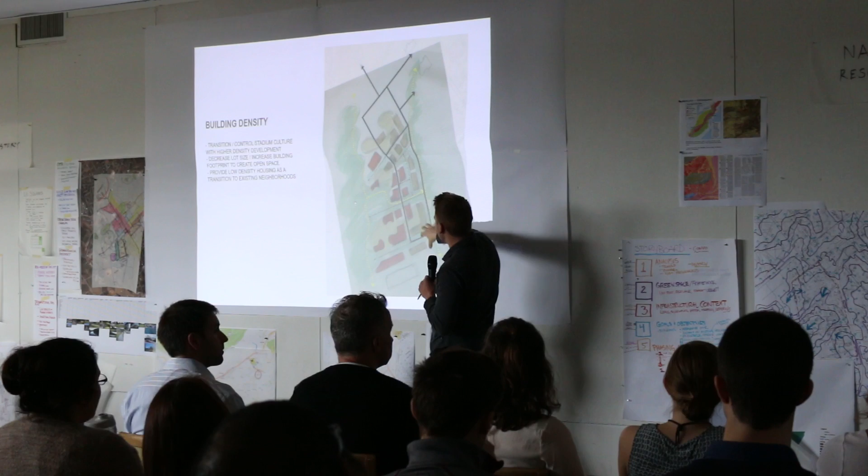So the low density kind of bleeds in from the east of the low density site, with these zones here in between these green streets and these open spaces. And then the higher density is on this main corridor and closer north to Old Town and downtown.

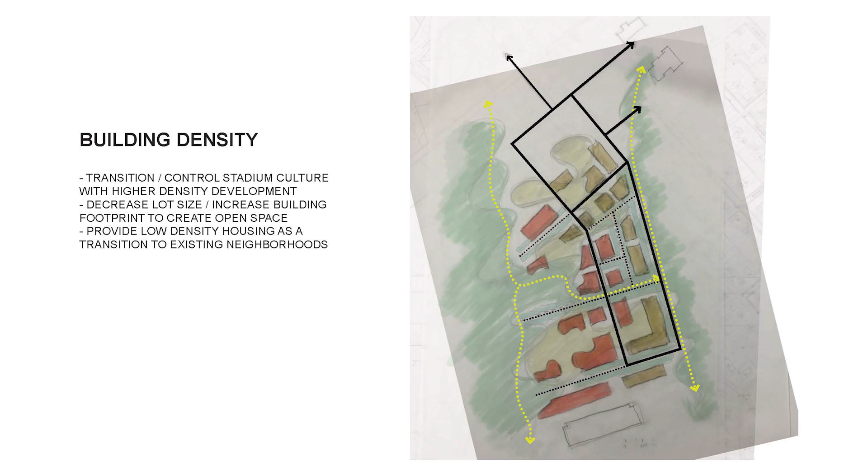And then this is just an overlay of all that put together. These can become these larger multi-unit residential areas around these event spaces. These are lower multi-unit residential, and you could really witness the landscape processes within these residences.

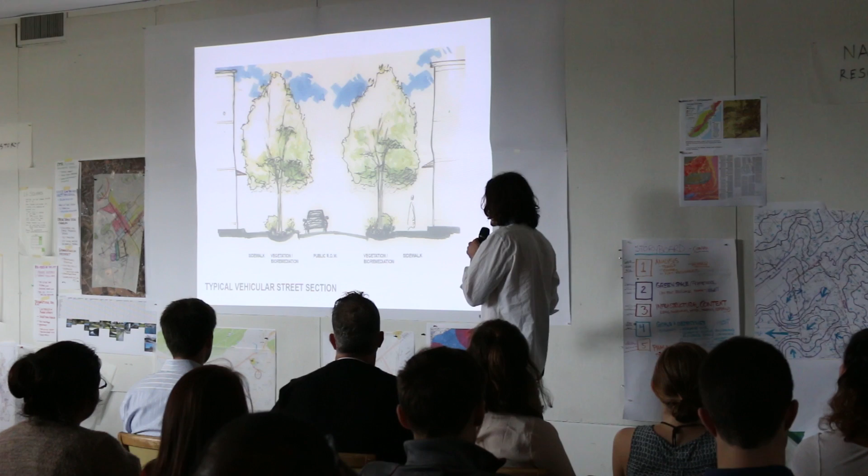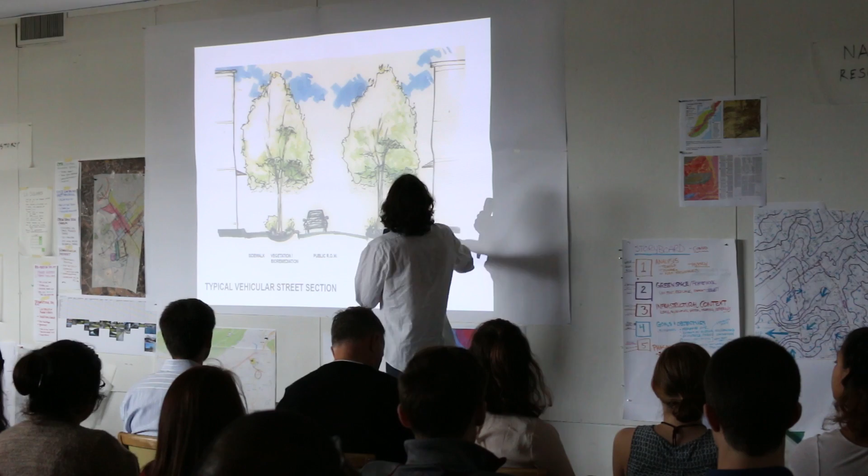This is giving a picture of what our typical street condition might look like. As you can see, we have the sidewalks, the bioretention, vegetation and remediation, and the public right-of-way in the middle. This would be our Center Street here, with the higher density directly lining that.

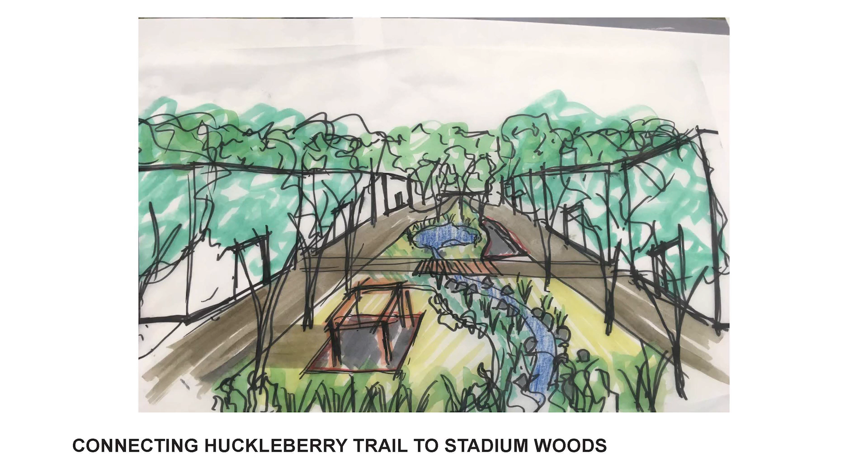This is showing what that central green spine connecting the Huckleberry Trail to the Stadium Woods might look like, taking care of water remediation and collection in that space and directing it towards the low point in the site. Directly adjacent to this would be pockets of smart growth at higher densities, so that we can have space for this green space.

This is showing what a connection to Stadium Woods might look like, because anyone who's visited the site has noticed the fence that inhibits access to Stadium Woods, which is really a strong asset to the community. We'd like to really emphasize that connection through our design intervention.

This is showing that we'd like to bring the stormwater collection and treatment to the surface as a way of dealing with it before we send it off into Stadium Woods.

This shows that if we're going to be densifying these edges along the streets, we have to make smart and wise decisions about how we use the spaces internally within the block. So we're reimagining them, instead of a collection of private spaces, as an overall public space framed by a denser development pattern, increasing the value of these public spaces and framing them with vegetation, water treatment, and higher density.

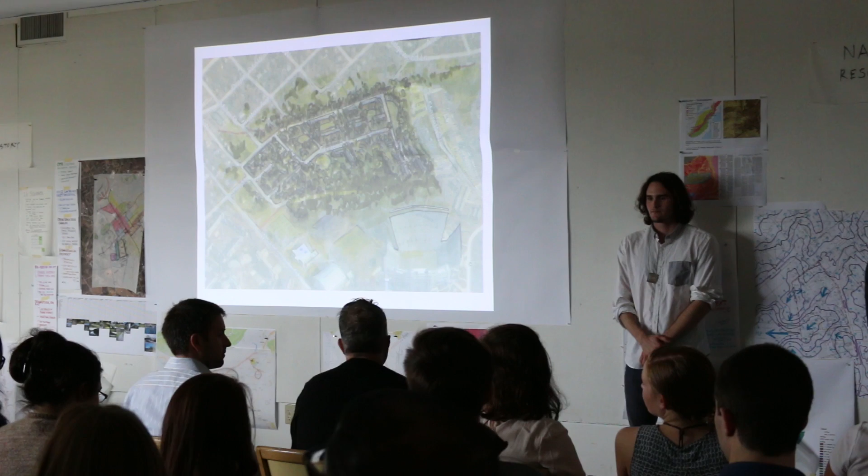Both presentations were very well done. What do you know about the environmental health of the old growth patch? What risks or threats are there to its future health, and what does your plan do to mitigate those risks? For example, is access and compaction a risk in and of itself, and how does the connectivity principle address that?

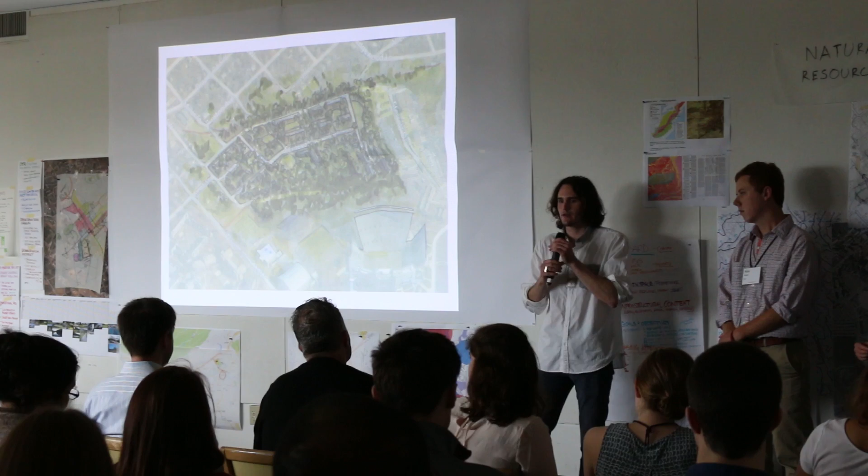I think that's a really good point, because even right now, I think the health of that forest is somewhat at risk because of all the game day traffic heading through there. So what we tried to do was focus on directing pedestrian connectivity through two specific points, so we can keep to an existing trail pattern and emphasize the connections to those points, so that we aren't disturbing or compacting the areas we're trying to preserve.

I think also, if you notice, we stopped the asphalt streets midway through the site. So we're bringing in these green streets. We're actually trying to reduce compaction and reduce the footprint of impermeable surfaces, so we can allow that old growth to creep into the neighborhood and become an essential part of it, rather than propose something that would damage it and be more harmful.

I think taking that a step further, it's also an opportunity to think of the streets as almost a seed bank for rejuvenating growth in that forest. So trying to foster the same species we see in the forest in the streetscape, and use that as a way to judge tree health and perhaps engage the student population in research on its future.

We didn't put that in a slide. No, you didn't. Hence the question.

What did you see as the relationship between Harold Street running parallel to Huckleberry Trail? You guys tried to bridge across, using Warren Street maybe as a link, but there were two parallel identities. You didn't talk about Center Street, but what about really the one that parallels Huckleberry right now? Is that a barrier? How are you thinking of that?

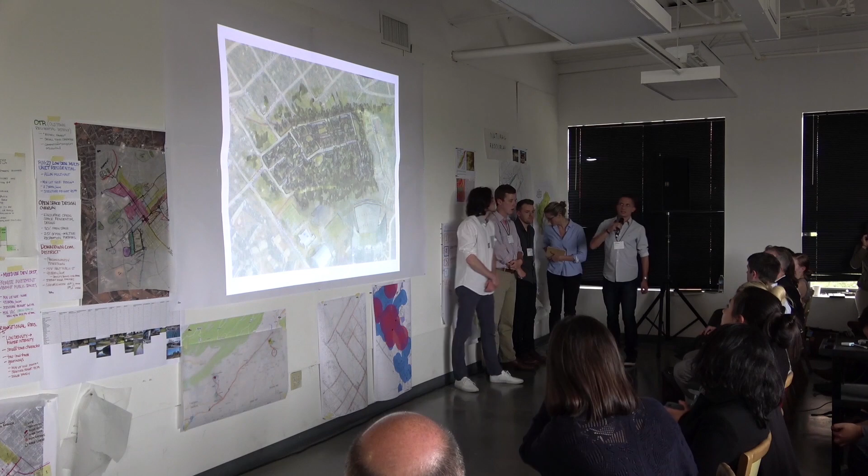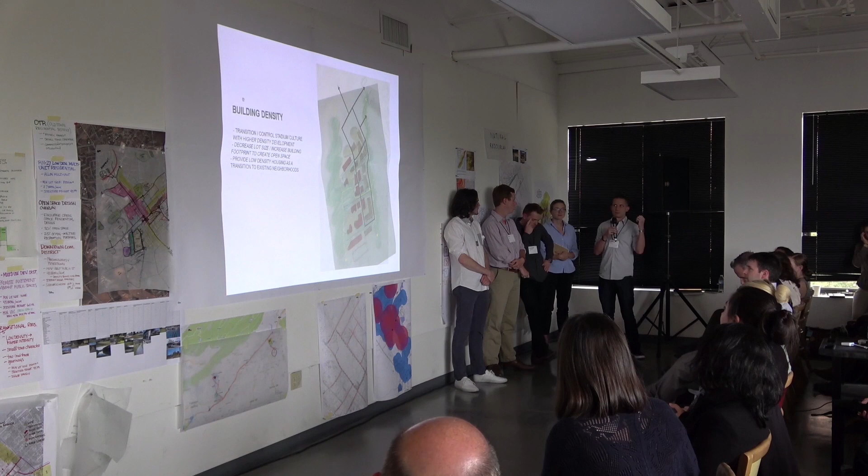I think the idea is that street, right now when you're on it, does truly feel like a barrier between the two spaces. What we'd like to do is open up one side of that Huckleberry Trail to actually feel like it's incorporated into the neighborhood, and bring it out into the space, so it becomes part of that community's asset and not just a method of pedestrian transportation through and past the site.

So we'd like to see it interact, whether that's through the green streets to the adjacent single-family homes. We want to keep that very low density, very easygoing, very relaxed, so you're not creating a hard physical boundary, whether through vehicles or through buildings.

We actually did at one point look at moving that parallel street of Huckleberry into the core of the site and having a core circuit. But given the linear nature of the site, it seemed like we were taking away from all the broader moves for the green space we could have had, so we pushed it to the edge and did what Jeffrey said.

So I think we have time for one more question before we miss the bus. Any other questions? Okay, here's the mic. Thank you. Thank you, guys. Yeah, so please give them a big round of applause.

The entire group worked so hard. It was wonderful. Great work, everyone, and thanks to everyone for coming out, and thanks for the challenging questions.